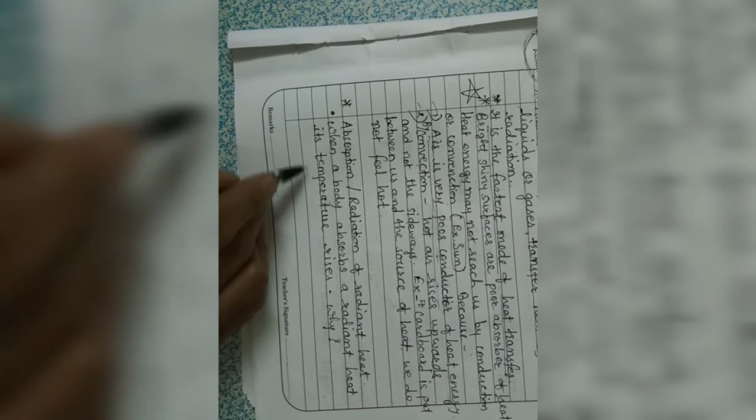Then, what is absorption of radiant energy? Here one question is there: when a body absorbs radiant heat, its temperature rises. Why? When radiant heat is reaching the surface of some solid matter, a part of it can be absorbed by the object, and a part of it can be reflected.

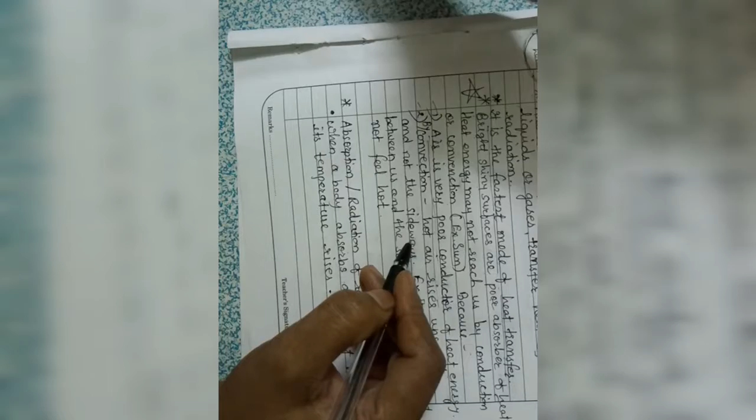All the heat will not be absorbed by that body. So it is the absorbed part which is going to raise the temperature of the body. The absorbed part of the heat increases the temperature of that solid body. So this is the reason why the body becomes hot.

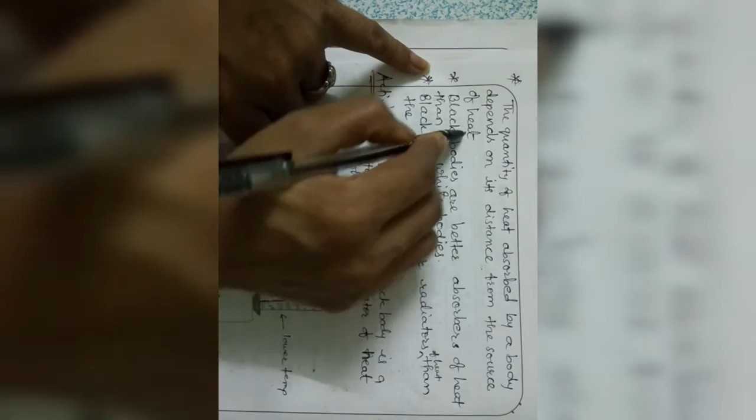Okay, then next we have: the quantity of heat absorbed by a body depends on its distance from the source of heat. If the source of heat is away from the body, then the quantity of heat absorbed will be less.

Okay, here one small activity is there. Suppose you take two thermometers and hang them or place them away from each other. Here you can hang the two thermometers and place a bulb here. Okay, this is the bulb, and put the switch on. Now this bulb is near this thermometer and this thermometer is away from this bulb.

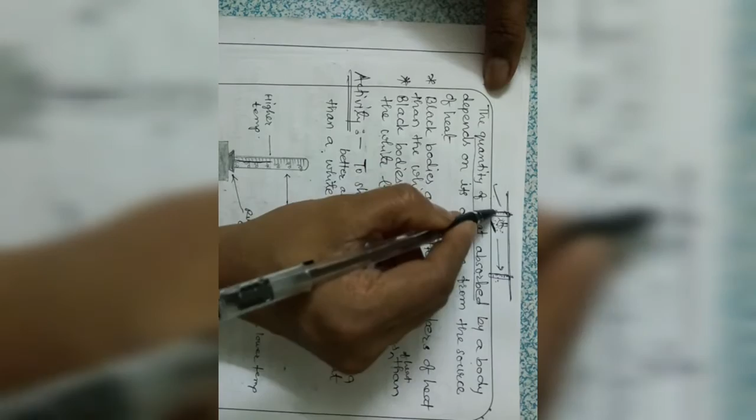So which thermometer will show more temperature? This one, because this thermometer is near the bulb. That means heat is reaching here more than this thermometer, and the quantity of heat absorbed by this thermometer will be more. Okay, that means the quantity of heat absorbed by a body depends on its distance from the source. This is the source. This thermometer is away from the source and this thermometer is near to this bulb, that is the source of heat.

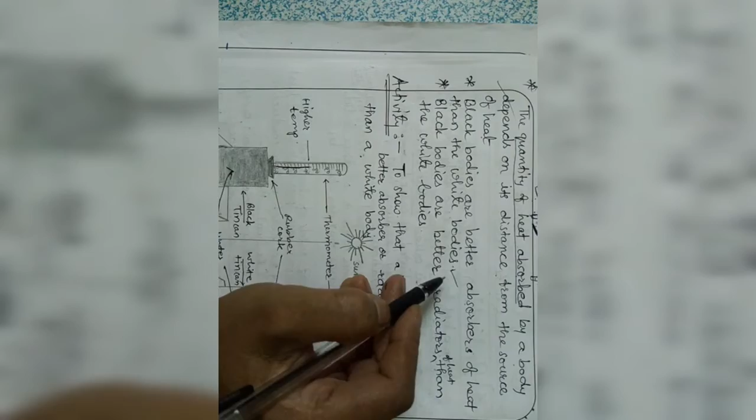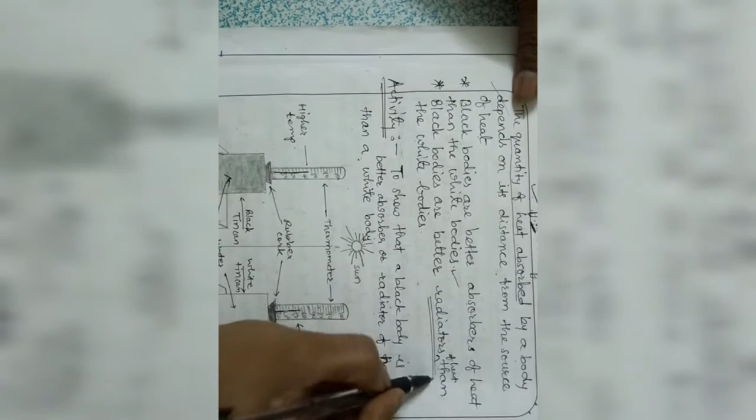Okay, then next, black bodies are better absorbers of heat than white bodies. Black colored bodies, or we can say dark colored objects, are better absorbers of heat. They can absorb more heat than light colored bodies. Black bodies are better radiators also. They are better radiators of heat, means they absorb more heat and in the same way they can radiate more heat from themselves.

Means suppose a black object is there and a white object is there, the same two objects, only the color is different. This is black and this is white. If you keep both of them in sunlight, then this will get hot early, this will take time. And if you keep them in the shade away from the sunlight, then this black body will become cool faster than this white body. That means this is a better absorber and a better radiator of heat. Radiator means it gives out heat energy fast.

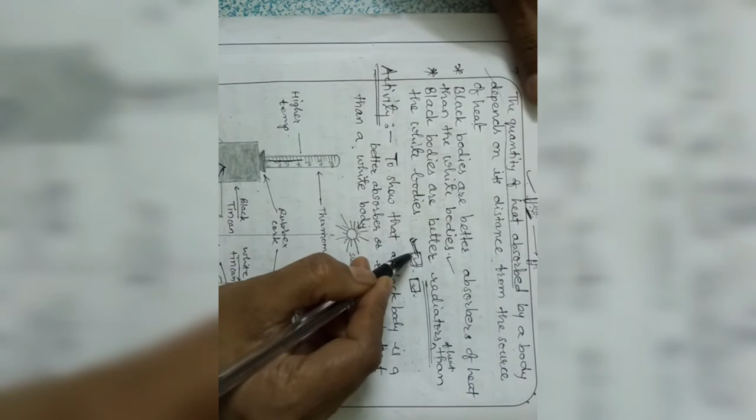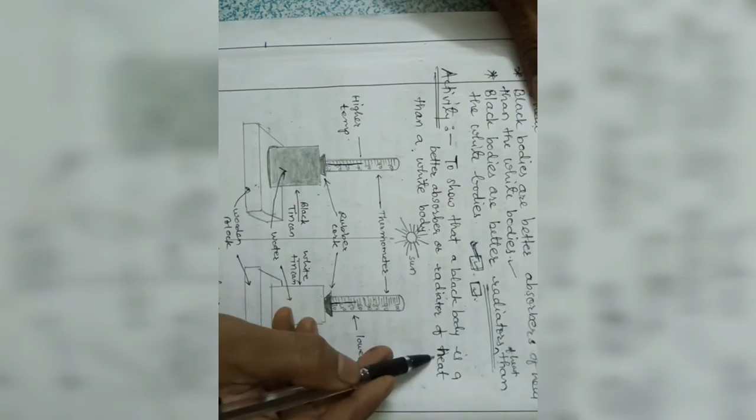Okay, so the radiant heat or the radiation energy means the heat that the body gives out of itself. Okay, here one activity is there to show that a black body is a better absorber or radiator of heat than a white body. So this is the arrangement of the things that we need for this activity.

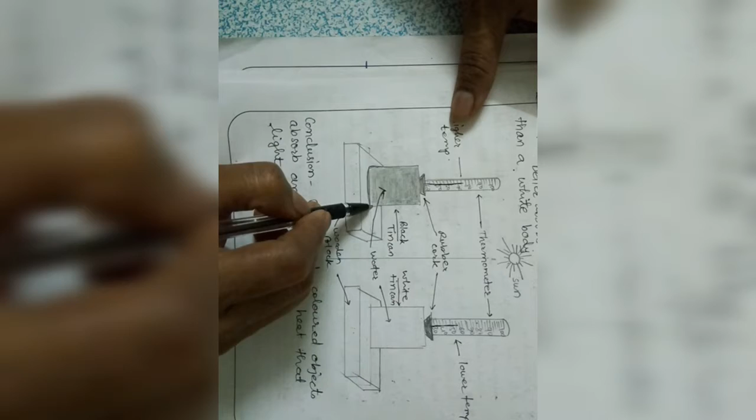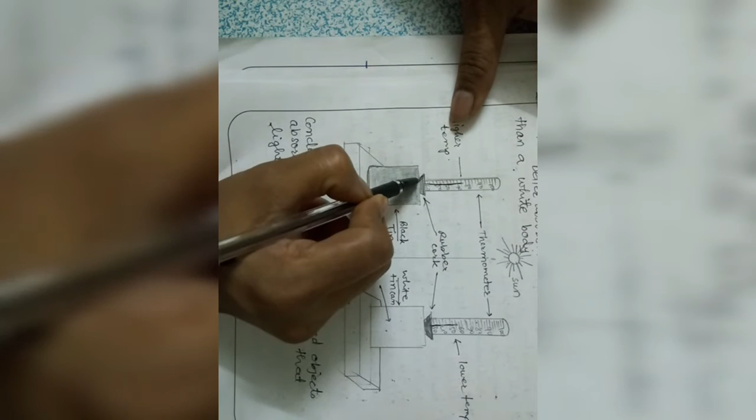Take two wooden boxes, okay, wooden blocks. Then on both the blocks you keep two cans. Here one tin can is painted black from outside. This is a tin can painted white from outside. Okay, then here is a rubber cork. This rubber cork is for attaching this thermometer to the can. This thermometer is attached here, this thermometer is attached here. With the help of the rubber corks we can fix the thermometers on the cans.

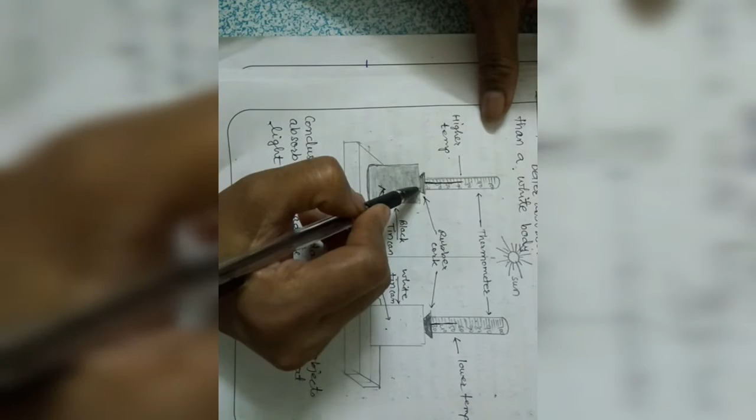Okay, so put both the cans in the sun and after a while observe. What will be your observation? You will see that the temperature of the thermometer fixed into the black tin can is more than the thermometer fixed into the white can. Okay, that means the black body or black tin.

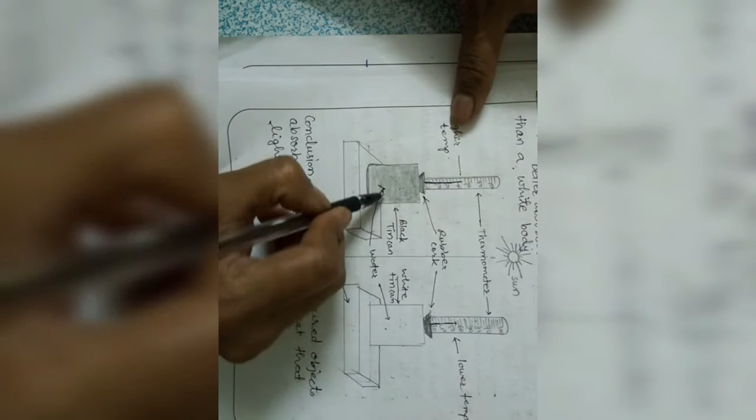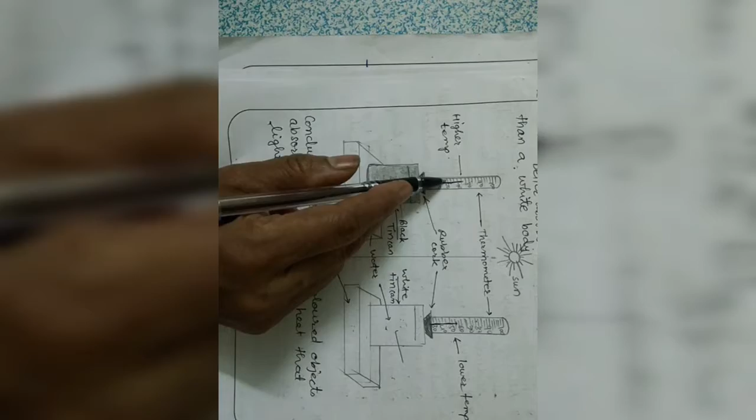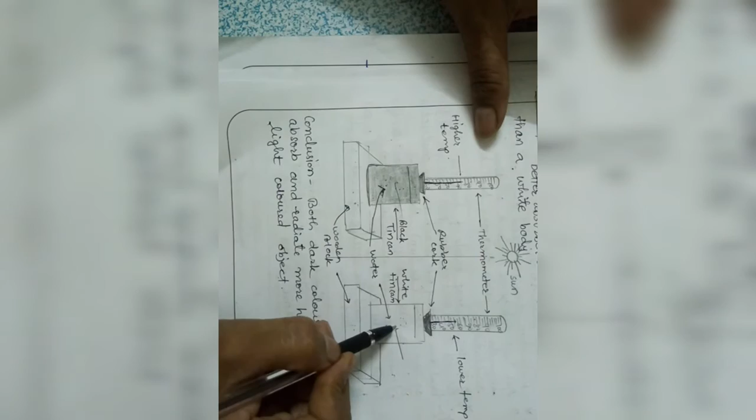Okay, here one more thing is there. You have to fill these cans with water. Here water is there in both the cans. This water will be heated by the sun and then the temperature will be measured. So in the black tin, the water will be heated fast because the black color absorbs more heat than the white can. Okay, then after that you note down the temperature on both the thermometers.

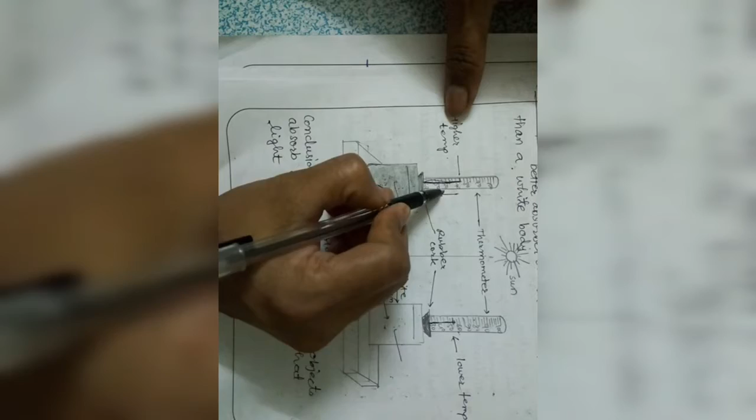Okay, then you keep both these cans, that is the black can and white can, in the shade away from the sun, in a dark room. Then you observe the changes in the reading of the thermometers. You will observe that the temperature shown by the thermometer fixed in the black tin can falls more and faster than the one fixed in the white can.

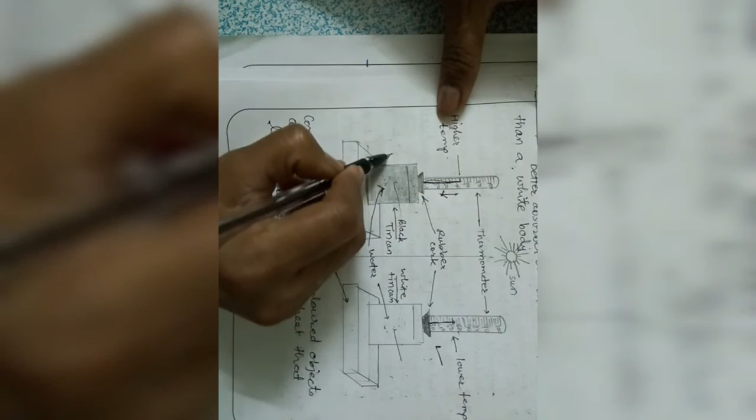So this thermometer will show less fall in temperature. Okay, that means this black colored can radiates more heat and it cools fast. It cools faster and this cools slowly.

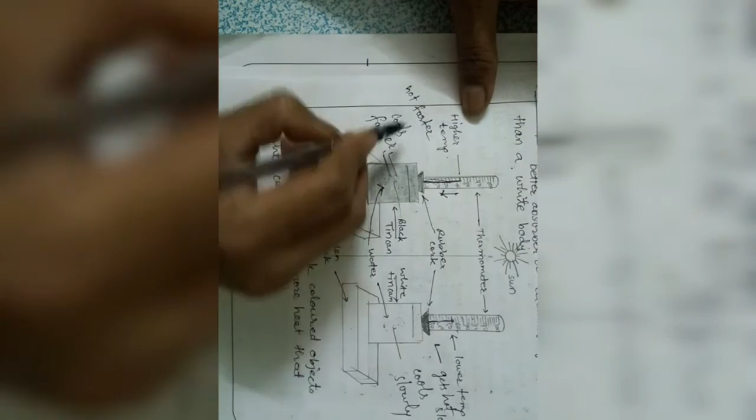Also, it gets hot faster and it gets hot slower. So from this activity we can conclude that dark colored objects absorb and radiate more heat than light colored objects.

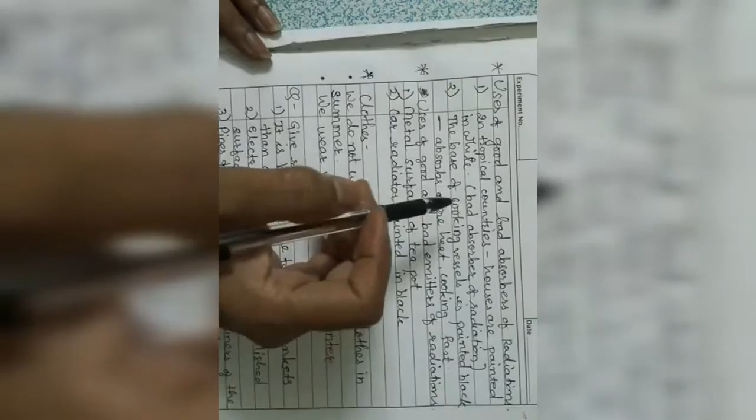Then what are the uses of good and bad absorbers of radiation? In our daily life we use so many things that act as absorbers or radiators of heat, and we apply this radiation concept in our daily life.

The first use of good and bad absorbers is in tropical countries. In tropical countries, houses are painted white because white is a bad absorber of radiation. It absorbs less heat, and therefore the temperature inside remains bearable.

Then, the base of cooking vessels is painted black. Why? Because black color absorbs more heat, so the cooking is faster.

Now, the uses of good and bad emitters of radiation. Emitters are objects that give out or emit radiant heat, or thermal energy.

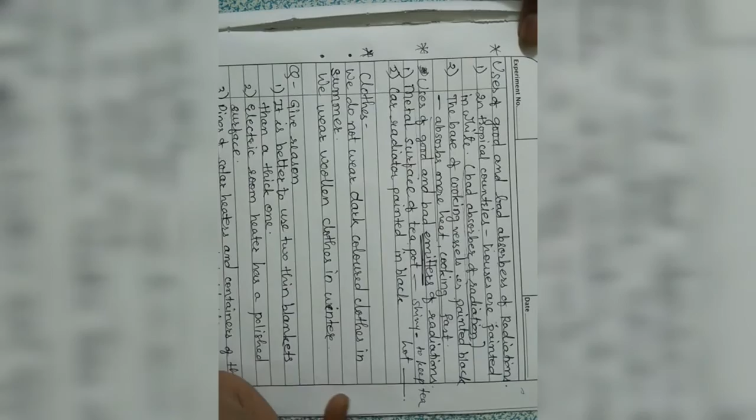First, the metal surface of a teapot. You may have seen that the metal surface of a teapot is shiny. This is so because it helps keep the tea hot for a longer time.

Next, the car radiator is painted black because heat is radiated away quickly, which helps cool down the circulating water, and the engine is therefore prevented from overheating. That's why it is painted black.

Same applies to the clothes we wear in winter and summer. We do not wear dark colored clothes in summer because they absorb more heat; we prefer light colors like white. We wear woolen clothes in winter because they absorb and retain heat, keeping us warm. Wool also traps a lot of air between its fibers, and since air is a bad conductor of heat, it does not allow body heat to escape, so we feel warm.

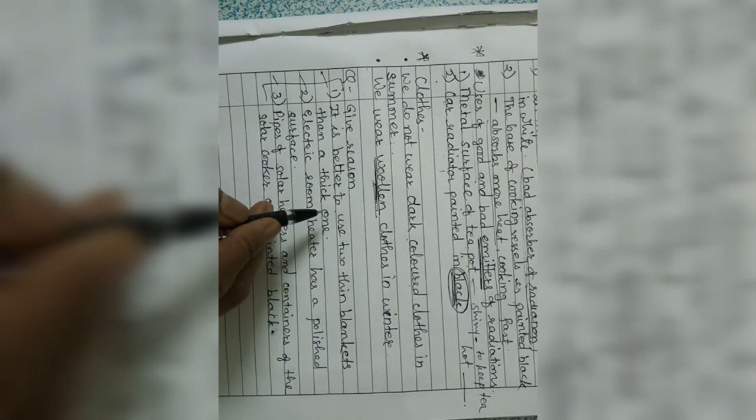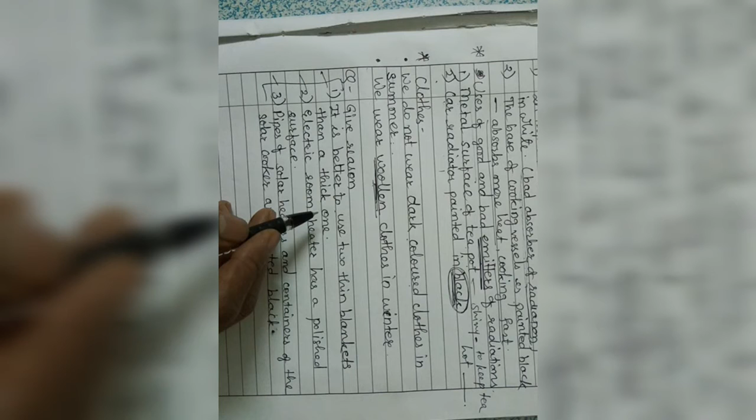Now some common questions you should know the answers to. First: why is it better to use two thin blankets than one thick blanket? Because the air trapped between the two thin blankets acts as an insulator, since air is a bad conductor of heat. This trapped air between the layers acts as an insulator and we feel warmer.

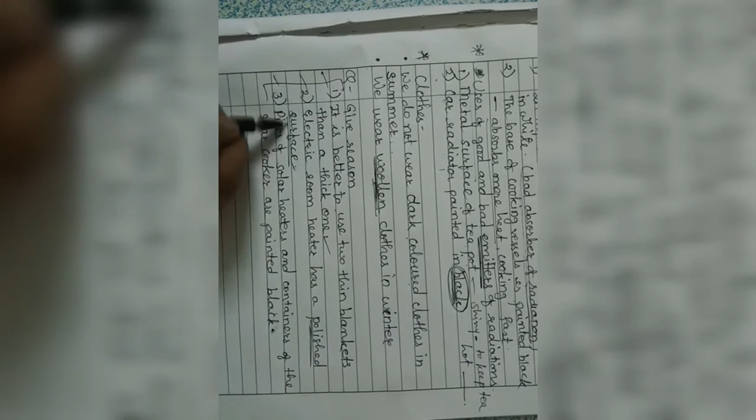Next: why does an electric room heater have a polished surface? Because the polished or shiny surface reflects back all the heat radiation falling on it, so every person sitting in front of the room heater feels warm. This polished surface reflects all the heat.

Next: why are the pipes of solar heaters and containers of solar cookers painted black? Same reason again—black bodies are good absorbers of heat, so the pipes and containers are painted black to absorb maximum heat from the sun. This way the water heats up very fast, and the food kept inside the solar cooker cooks quickly.

These are common questions, and you should know these answers after studying the radiation topic. So this is all about our chapter number four, that is heat.